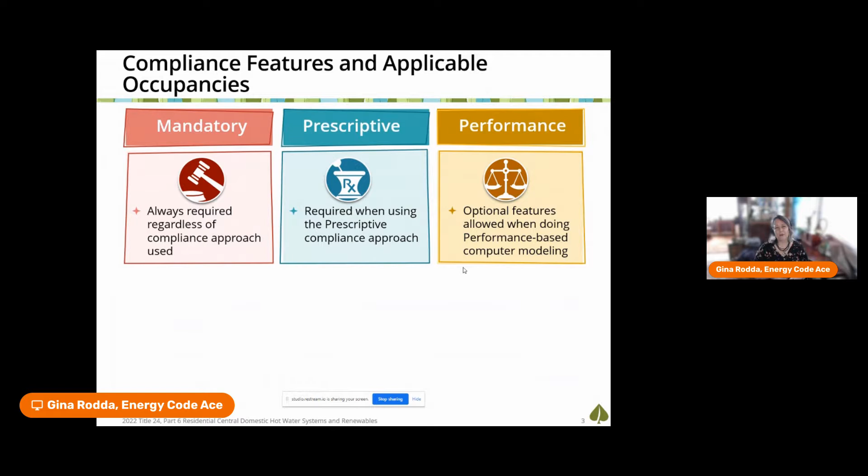Prescriptive is also a way of showing compliance, but we find a lot of people use our performance approach in California. With the performance approach, you use state-certified software, which everyone loves, let me tell you. It allows you to trade prescriptive measures down to mandatory minimums, but never lets you trade away those mandatory minimums.

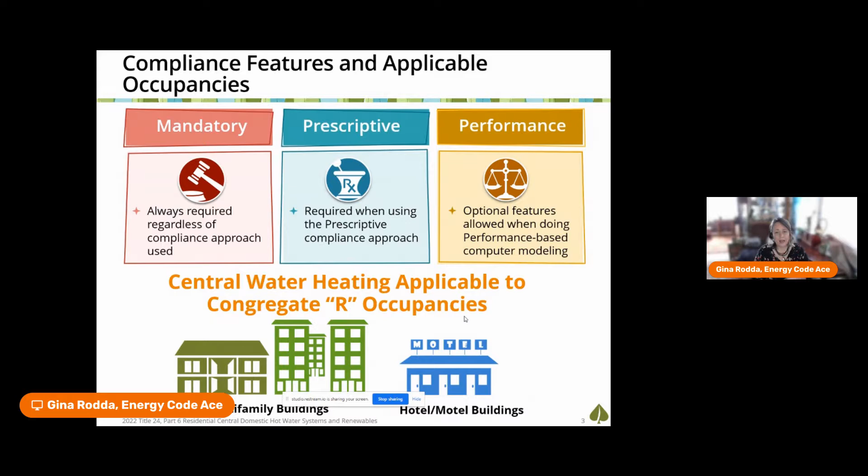My topic today, across these buckets of mandatory, prescriptive, and performance, is central water heating options for our R occupancy buildings—this includes multifamily buildings of any size and hot water systems for hotel/motel buildings. I will not be covering single family.

One new thing for this next code cycle is a new metric used under the hood in our performance approach. Up until now, we looked at energy efficiency measures using time-dependent value, or TDV—what time the energy is being used, dependent on where the building is located among our 16 climate zones, and what energy source is being used.

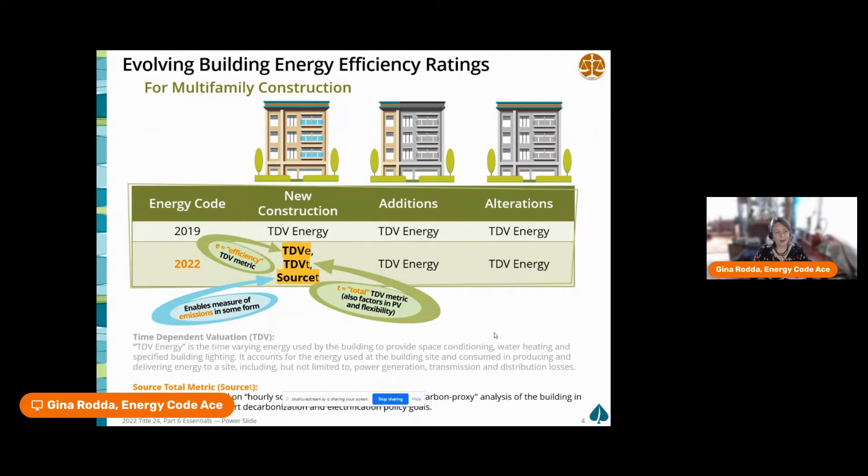New to this next code cycle is a source total metric that looks at the carbon footprint associated with the specific energy type being used. This is a whole new thing we're looking at as we try to move toward a carbon-zero grid here in California sooner rather than later.

When we look at central water heating options for multifamily and hotel/motel buildings, I'm only looking at central systems—where one piece of equipment serves either multiple dwelling units or multiple hotel/motel rooms. I will not be looking at the individual one-water-heater-per-dwelling-unit option; I'm concentrating on central systems.

Pretty self-explanatory: if you want to use gas, and gas is still a choice in California in this next code cycle, you'll take a penalty for going with a gas central system because of the source energy calculation under the hood in our performance calculations this next cycle. You'll also have to meet minimum efficiency requirements.

Recirculation is something very much looked at in California—what can we do to help improve energy efficiency there? We'll hear more in a few minutes about the research behind this. If you go with a gas central water heating system, you'll have to prescriptively provide a solar thermal system paired with it.

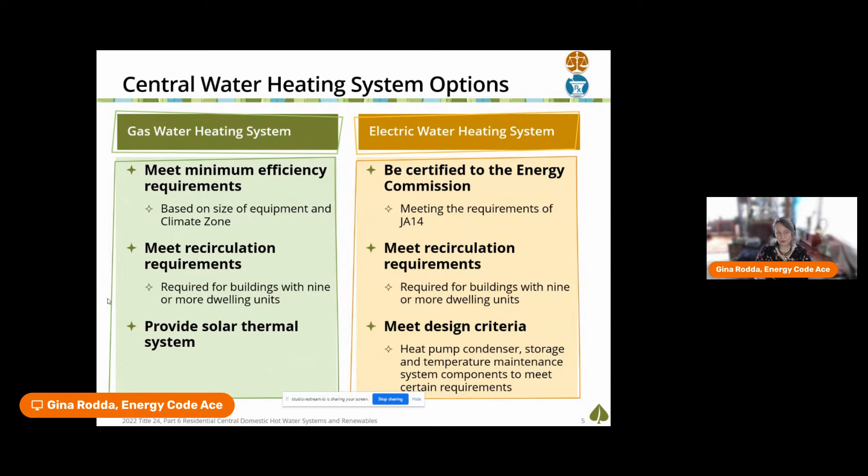What's required is that the design system must meet design criteria associated with central heat pump water heating systems. What you don't see here is that if you go central heat pump water heating, you won't have to do a solar thermal system. But you'll see in a few minutes that PV will be required in this next code cycle for these building types, to help support these systems with source energy at the site.

So there are 4 major components to central heat pump water heating systems. Remember, it's not an efficiency, it's a design criteria. This is a breakdown of that design criteria of what needs to be in play to meet these prescriptive central heat pump water heating requirements, which will set baseline in our performance calculation, with the exception of the multipass.

The baseline will be single pass, whereas prescriptively you can either do parallel multipass and/or single pass. You can decide which way you want to go prescriptively without penalty—it's totally supported either way. But there are specific requirements regarding the transfer of water, which is potential loss of energy, between the heat pump systems generating that heat and the primary storage tanks, and also the compressor cutoff temperature.

The primary storage tanks really need to be sized properly. Undersized storage is the big point of failure that might happen with central heat pump water heating. So we have temperature set point requirements, tank insulation—I hope everyone realizes that's just common sense—and specific language about the recirculation return loop.

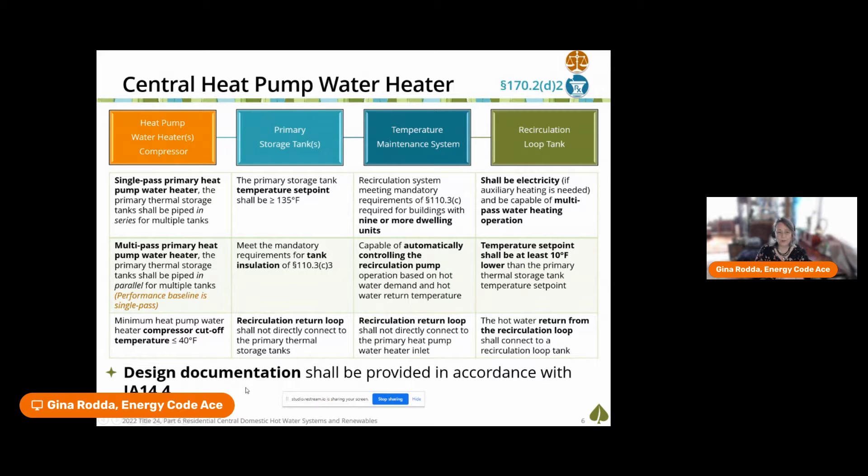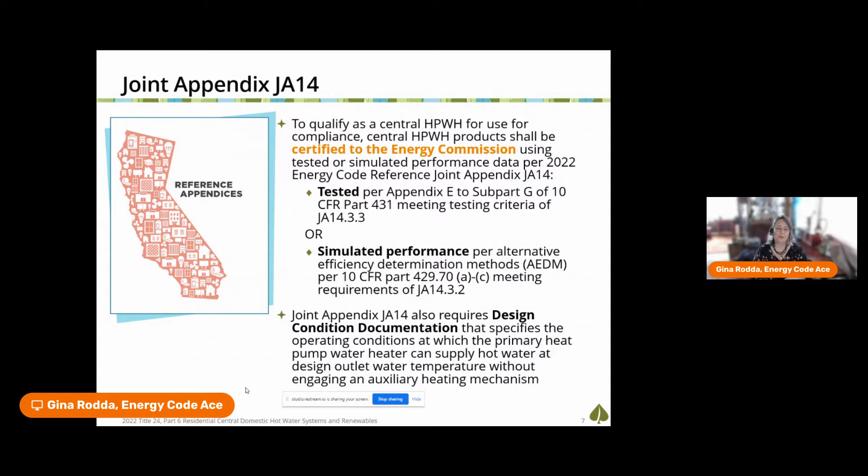All of this then has to be documented at design per the design criteria I just talked about, in our Joint Appendices Chapter 14. This is another document that supports code here in California. It's not the code language itself, but appendices information supporting how things are to be installed and designed. This is how California is trying to set a minimum standard of design efficiency, since we don't have a tested efficiency rating we can tap into.

Solar thermal systems are only prescriptively required when there's a central gas system, whether natural gas or propane, which, depending on your climate zone—in our milder climate zones—requires a 20% solar saving fraction. To me that's such a low bar to pass; these seem like very low numbers. Most of the solar thermal systems I see are 55 to 60% solar saving fraction, so there's a lot of room for growth in providing more stringency than required by the state code. In our hotter, more stringent temperature-fluctuating climate zones, that solar thermal fraction is 35%.

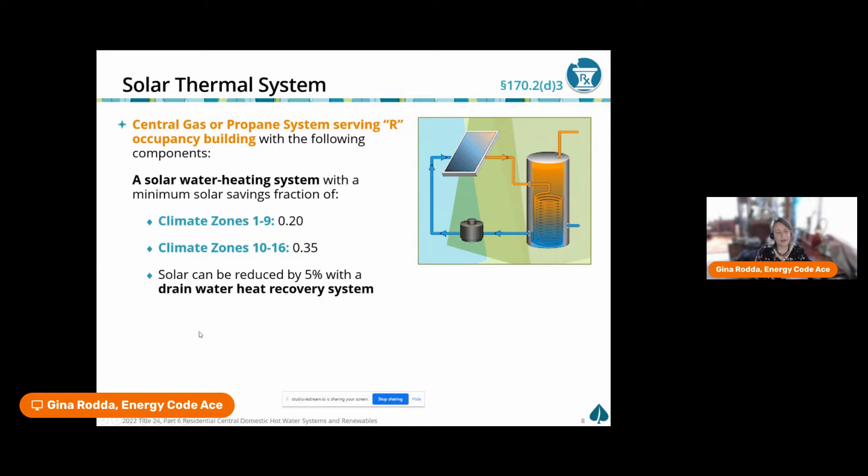We're trying to introduce drain water heat recovery more into our buildings, and one way it's used to help support our central water heating systems is that if people want to reduce the prescriptive solar fraction for these gas systems, they can do that by engaging the design and use of a drain water heat recovery system.

Part of what I want to talk about is our renewable requirements that are brand new to this code cycle for this particular building type, both hotel, motel, and high-rise multifamily buildings—those are buildings 4 habitable stories or greater.

We're looking at all the roof areas associated with the project—the roof of the building itself, but also any other buildings or structures on the property, such as carports. The requirement is based on what climate zone you're in, and we provide a factor based on climate zone multiplied times the conditioned floor area of the building. Or, how much viable roof you have, multiplied times 14 watts per square foot—whichever is less sets the minimum PVKW requirement of that building.

The performance approach may provide flexibility. We don't quite have the software yet for the next code cycle, so I haven't had the opportunity to explore what that might give us in terms of greater or lesser PVKW—I'm not so sure yet. There are some exceptions to when you don't have to consider PV, if you don't have enough solar access. They've defined that as not having at least 70% annual solar access over the course of an entire year at any roof on the property.

We do get to exclude occupied roofs. This is brand new for this code cycle, where that is an exception. And any roof area that needs to be reserved for other code requirements, such as fire egress or window washing egress.

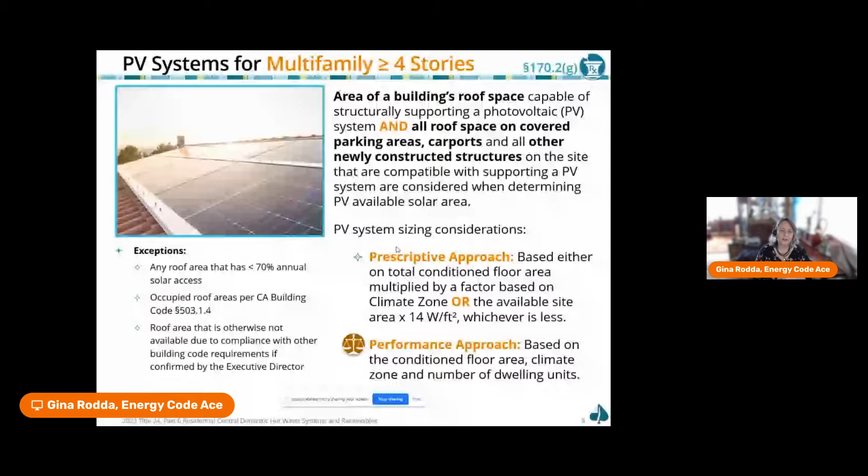What's also pretty exciting in California, for the very first time, battery storage will be prescriptively required. This is kind of ground shaking. This is associated with our multifamily buildings four stories or greater and our hotel motel buildings of any size. It is not associated with our low-rise multifamily buildings, which are three habitable stories or less. So there's a little bit of a difference depending upon how many stories are associated with a multifamily building.

But this is 100% tied to how much PV kW is required. So there are requirements based on climate zone, and it looks then at the PV kW requirements of PV and applies storage and energy factors that are going to dictate the size of the battery.

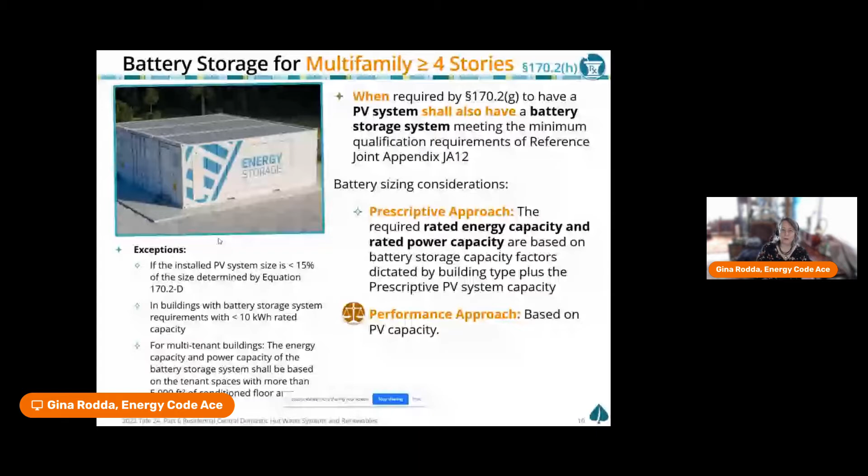There are some exceptions also to batteries, such as if your PV size that you're actually putting in the building is less than 15% than what you were prescriptively required to do—that's a turnaround, easy to understand. Or if you do all of the calculations and it has determined that your PV kWh of the battery is less than 10, that is an exception, since that is an expensive system for a low load. And remember, the energy code is based on cost effectiveness.

So first, I'd like to give a little bit of background. As many of us know, our country is shifting toward electrification of residential buildings, and this is a large part of our overall decarbonization strategy. The thought being that we both electrify end uses in homes like cooking, space heating, and water heating, while also decarbonizing the electric grid. Now, in single family residences, this becomes particularly expensive when a home needs a panel upgrade to accommodate a 240 volt heat pump water heater.

Maybe where there was an electric resistance storage water heater, the existing panel could be sufficient for that 240 volt heat pump water heater. But when the water heating load was previously fossil fuel fired, it's likely that the panel capacity might become an issue. That, paired with the reality that most water heater replacements are reactionary rather than proactive, makes fuel switching a challenging endeavor for any homeowner.

Now, the retrofit-ready heat pump water heater specification mobilized the development of plug-in 120-volt heat pump water heaters capable of operating on a 15-amp circuit, to accommodate homes without the electrical service and panel capacity for 240-volt heat pump water heaters.

We have heard that the 120-volt heat pump water heater does not have an auxiliary heat source and may have performance limitations in larger households in colder climate locations, especially where water heaters are installed in semi or unconditioned spaces.

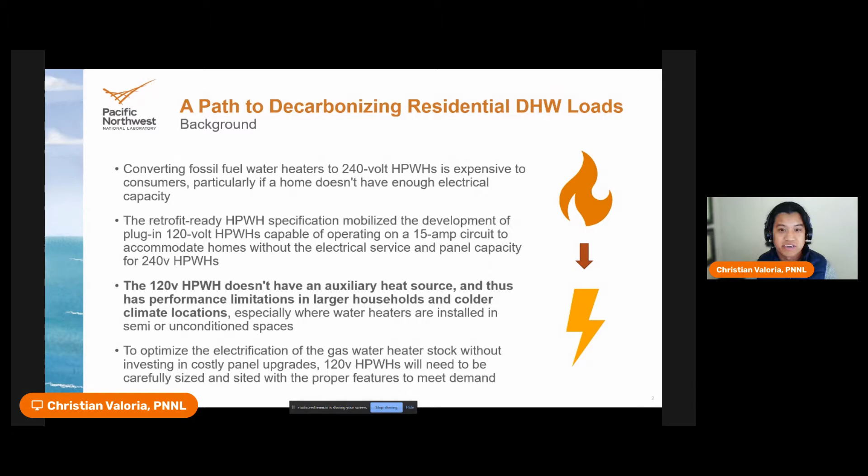So what did we do? We did a scoping analysis, a very light scoping analysis, to address challenges for electrification of residential water heating loads, particularly to further understand different 120-volt heat pump water heater configurations and where they may be applicable to target residential building stock. We did so in two ways.

So the first way, the image over to the right here on top, we did a 1-hour hot water delivery assessment to assess the delivery capabilities of different heat pump water heater configurations in different locations as compared to the baseline water heating systems.

The second thing we did was a simplified hourly analysis. As you can see on the bottom right, this is just a snippet of the Excel spreadsheet. This was to model energy use, carbon emissions, and utility costs across different climate zones, water heater locations, household sizes, and heat pump water heater system configurations.

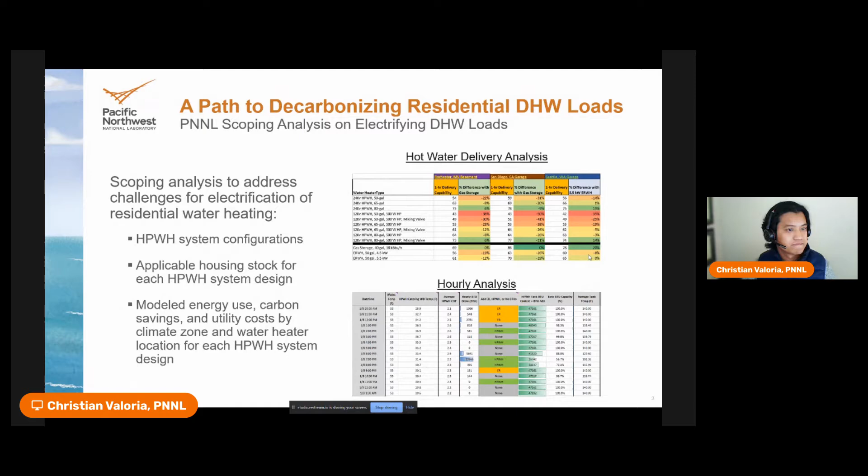This is really just to give us a sense of how hot water delivery may change from the prevalent water heating technology in each city. For example, we may presume that the typical type of installation in Rochester, Minnesota would be in a basement, and it would be a gas storage water heater. So that's why we have that as 0% in the left column. And across all the different water heater types and configurations, you can see how that 1 hour delivery may change.

And we did this for Rochester, Minnesota; San Diego, California, for a gas storage water heater in a garage; and for Seattle, Washington, with an electric resistance storage water heater, also in a garage.

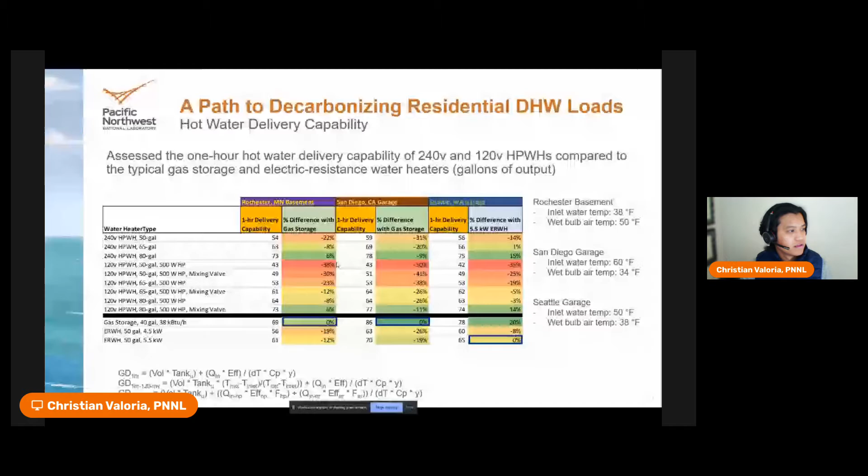The second thing that we did was a more detailed hourly analysis methodology. We did this to really explore the different heat pump water heater configurations and their applicability to different target housing stock.

In this parametric analysis, we looked at both 120 volt and 240 volt heat pump water heaters. We used a standard compressor size of 500 watts, but also wanted to investigate how a larger compressor might impact our results, to somewhat match the input of a typical gas water heater, or get closer to it, not match it. The other things we varied were tank size, as well as whether the heat pump water heater had an integrated mixing valve.

In total, the parametric analysis resulted in 3,360 runs. You can see all the representative cities here, the different domestic hot water system locations we've modeled, as well as the different number of bedrooms, 1 through 5.

You'll also see the data sources in this table to the left. Now, a few disclaimers for this model: we used very simplified heat pump water heater control logic to determine when electric resistance is triggered, based on the last hour's tank BTU capacity and the entering air conditions.

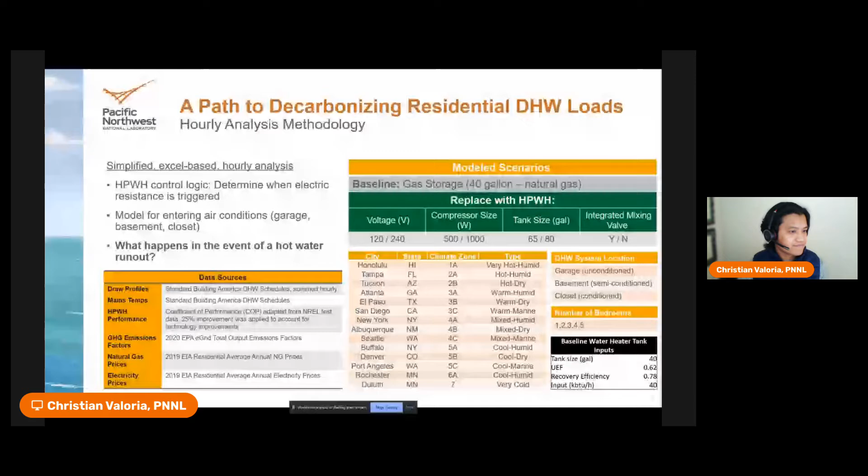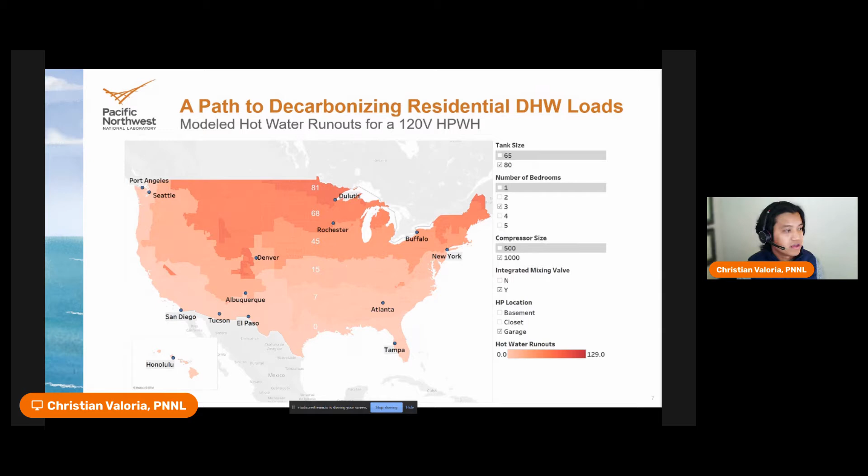You still might experience some hot water runouts, and these numbers I'd say are more for comparison. Like I said, we didn't run this on multiple types of domestic hot water schedules, just the standard schedules from Building America. That would be somewhere we could take this further.

As part of the hourly analysis, we also looked into utility savings and carbon emission savings for our different system configurations. With all the different combinations of features of heat pump water heaters coming to market, it's essential that proper education and design guidance for sizing, selecting, configuring, and siting heat pump water heaters is available to contractors and do-it-yourself installers.

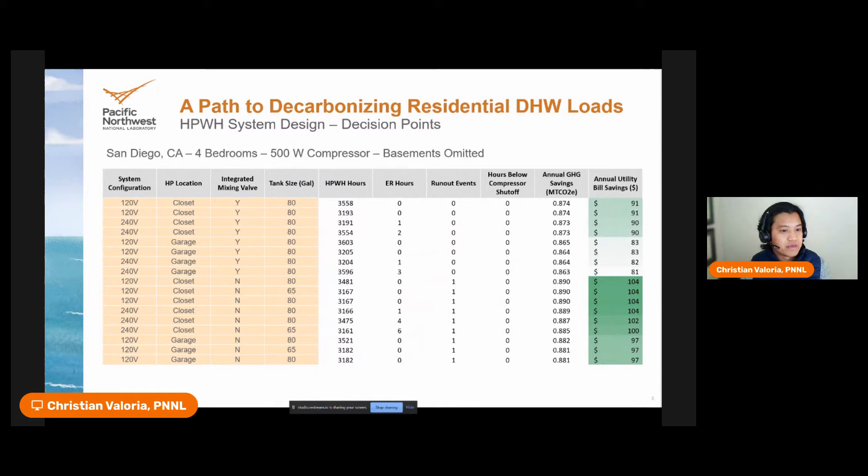In conclusion, we saw that the 1-hour delivery capability for heat pump water heaters was typically less than that of gas storage, and tank size nearly had to double to come close to the same amount of 1-hour delivery. In our hourly analysis, we found that 240 volt heat pump water heaters could meet demand in most homes, and different 120 volt configurations could work in many locations, but great care should be taken for each individual installation, or to create guidance for certain regions.

There are also a lot of variables to consider regarding heat pump water heater selection and fuel switching. Where should the heat pump water heater be located? Is an integrated mixing valve necessary, and what size tank is necessary? There are also multiple decision points: first, is that heat pump water heater able to meet the demand? And then you'd have to decide what saves the most money and what reduces carbon emissions the most.

I think this study, this assessment, can go a lot deeper. It was very much a scoping study, so there's a lot more to play around with, explore, and fine tune. But I think it really gives us some good insights into heat pump water heaters. And I think that's all I have.

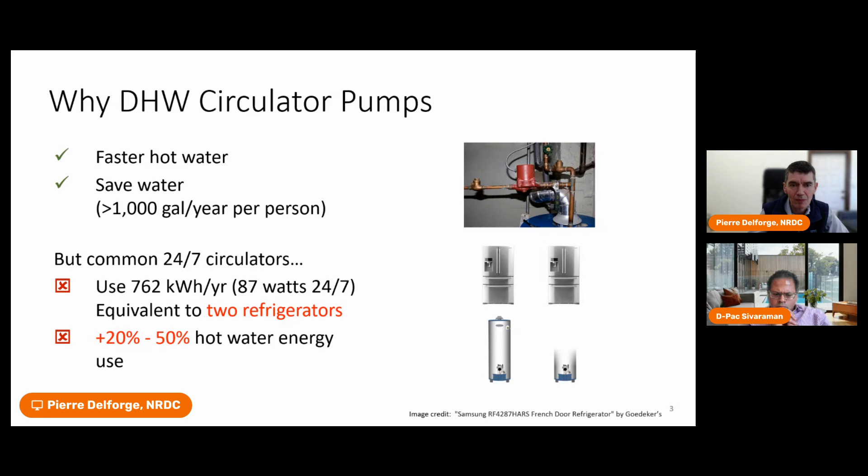So recirculation pumps can broadly be classified into 3 categories in terms of the controls they use. The first one, obviously, is the one without controls. And unfortunately, that's the vast majority of the pumps that are being used today and still sold.

Then the second category, one notch higher, is timer-based recirculation pumps. It's a bit better, but field data shows that a lot of these timers are not effective. Many of them are disabled over time, actually about half of them. And those that remain enabled run the pump for most of the time. So they really don't save that much.

And then you have the advanced category, which has a number of different types. The first one, maybe the most obvious or known, is the on-demand type. Although the on-demand type doesn't necessarily work for all applications, particularly in large buildings, where other types of solutions like aquastat controlled and thermally balanced variable speed tend to be very effective for this type of applications.

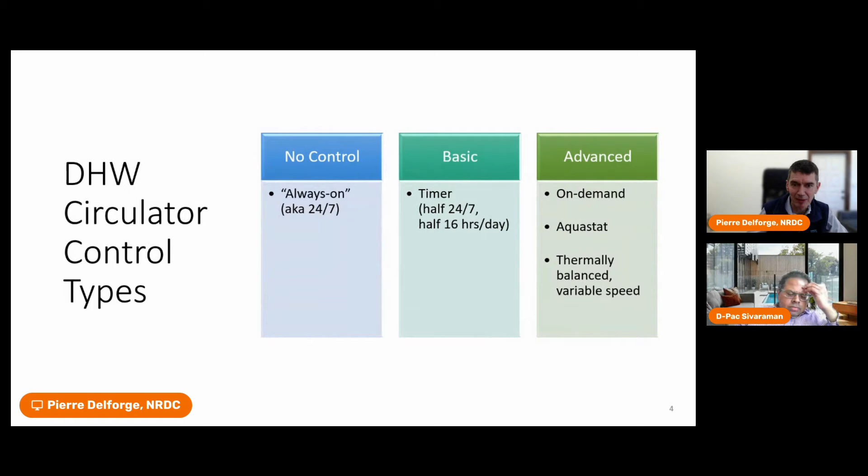All right, with this, I'm going to hand it over to Deepak to take us through the methods, analytics, and results, and I will bring it home with the last couple of slides.

Gotcha. Thank you, Pierre. So this is how we set up the problem. We wanted to find out what happens when you go from a 24/7 continuously operating circulator pump to an on-demand pump. So that's your start point and end point. And then we wanted to find out what are the benefits from it.

So there are two types of benefits. The one that is more commonly studied is the electricity savings from reduced pump operation. As you move from a 24/7 case to an on-demand case, your pump is going to operate for a lower period of time throughout the year. So there is that benefit.

And then the often less studied one, the actual thermal, the fuel savings from reduced water heater operation, because when the circulator pump operates for a lower period of time, the water heater in itself also operates for a lower period of time. So that is the less studied one.

And we also took a first pass at it. The results are approximate in that context in terms of fuel savings, but we did want to take a first pass at it. And then the metrics is essentially energy and CO2 savings. Towards the end, we also calculated payback period to see if it's economically beneficial in this case, or if the investment pays for itself within the lifetime of the circulator pump. Next slide, please.

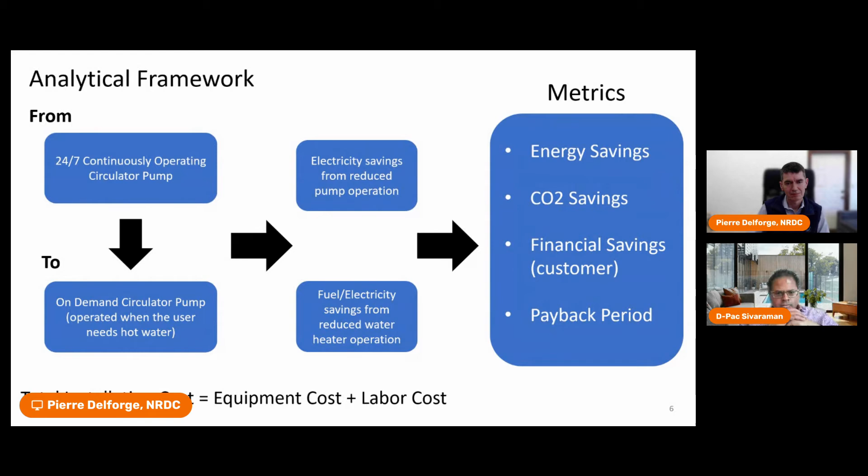As you can see, the two stars, the star on the far left, that's a 24/7 continuously operating pump. So obviously it operates for 8760 hours a year. And then the far right, if you shift to an on-demand choice, these estimates are from DOE RFI for circulator pumps for hot water recirculation. So when you go from 8760 to 92 hours, that's where your benefit derives from. That's the reason for the benefit.

So we wanted to find out, for ground truth based on DOE RFI's estimates, how much of benefits we can accrue when we make the shift, and how does it differ based on different water heater type technologies as well.

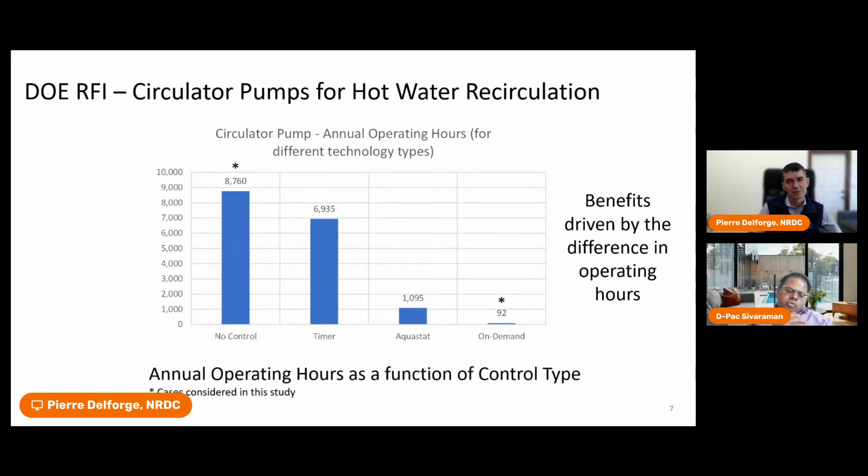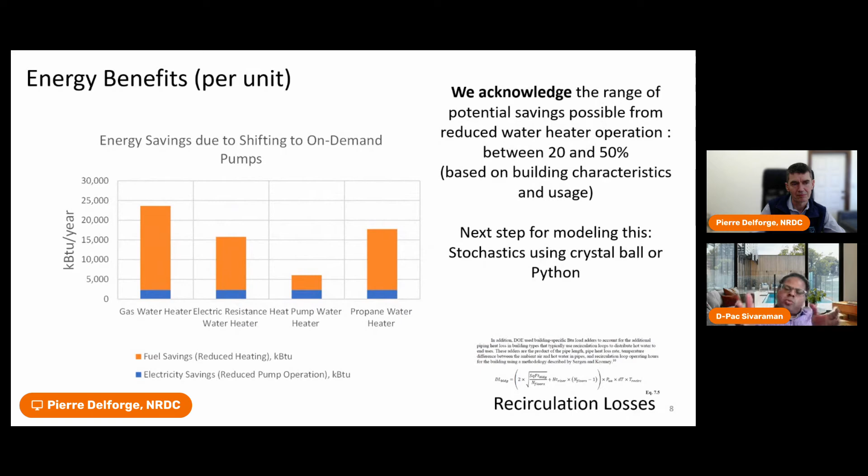So from our estimates, because we did use deterministic estimates, from our understanding, between 20% and 50% savings is possible when you shift from a 24/7 to an on-demand circulator pump. Next slide.

So it's a case of how much you reduce when you shift to on-demand circulator pumps, and also what water heater you pair the circulator pump with. Both of them drive the benefits. In all cases, you see a range of results, but it's much lower than 15 years, which is the industry standard for an average circulator pump lifetime.

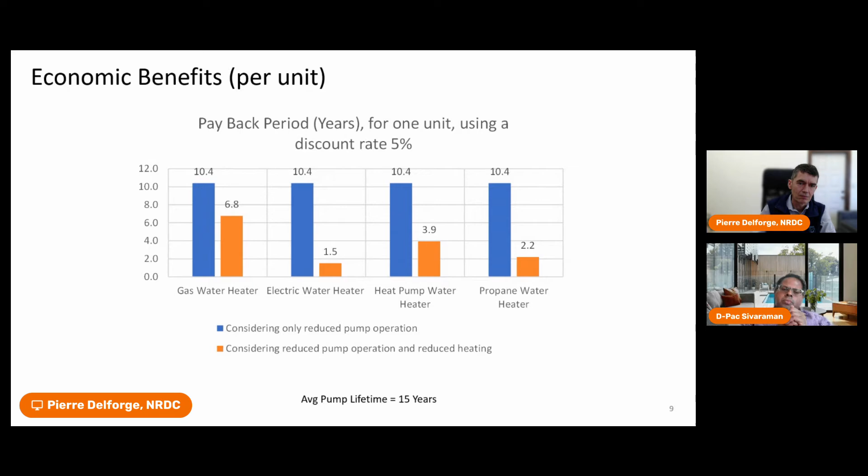And I'll give it back to Pierre. Thank you, D-Pac. So how big of a deal is this opportunity? When you do the numbers, it turns out it's pretty big.

So we modeled two scenarios in terms of penetration of various mix of water heaters over the next 10 years, based on different California policy scenarios. The first one, the high scenario, is based on AB 3232, which required the California Energy Commission to assess the feasibility of decarbonizing California's buildings by 40% by 2030 from a 1990 baseline. Then a slightly more modest scenario sees significant but slower electrification.

In both scenarios, the circulator was replaced by an on-demand model at water heater replacement. And the analysis was focused on single-family residential.

So we found somewhere between 5 and 6 million tons of CO2 over the next 10 years, just in California. Extrapolate upward of 50 million tons nationwide. And again, that's just for single family residential, not including multifamily central systems, which would increase this significantly again.

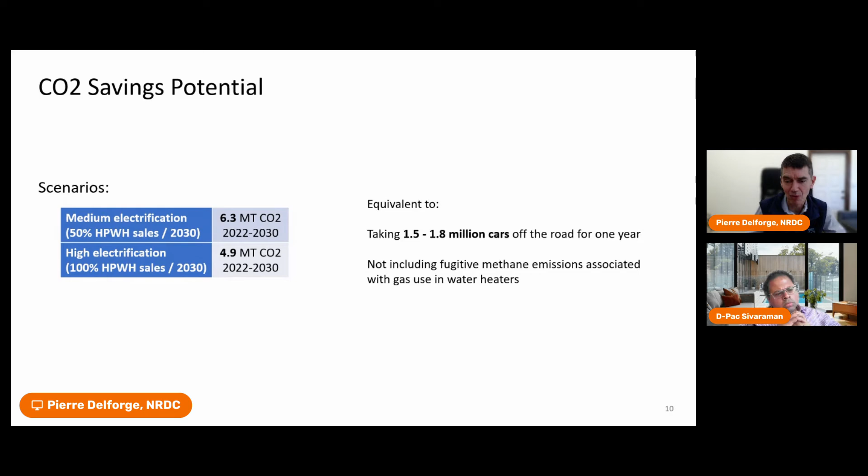This makes recirculation pumps one of the major opportunities for building sector decarbonization, and one that is super cost effective. Looking at D-Pac's numbers, payback is somewhere between 1.5 to 7 years. So that's one of the most cost-effective decarbonization opportunities, and one of the most major ones available to us in the next few years.

So the last question we want to cover is, what are the policy instruments available to capture this opportunity, particularly to win the big prize, get the entire market and existing building stock to transition to advanced controls? The four major ones we identified were the DOE Appliance Energy Conservation Standards, which are in progress. The RFI just closed, and we're looking forward to seeing the proposed standards.

There's also California's own Title 20, its own appliance program. Particularly, recently, the Senate Bill 49 in California gave CEC new authority under Title 20 to set appliance standards for demand flexibility, basically for controls. Under this particular authority, California could set standards for controls on demand recirculation pumps.

And then the other two major approaches are building codes, but for new construction that's already being used, both under the National Model Code, IECC, and in California with Title 24, where they've already set requirements for new buildings on recirculation pumps. But the big opportunity, if we want to address the existing building stock, basically alterations, would be to require the replacement of the pump at upgrade or retrofit.